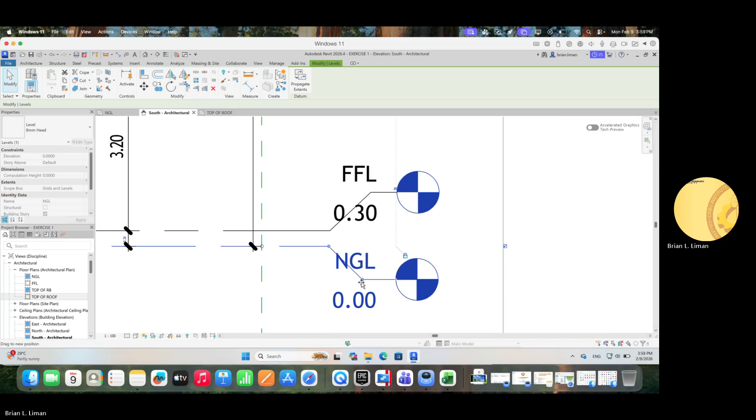That is to avoid text that overlaps. Again, as designers, when we document, we present as much as possible with legibility in mind. No text should overlap, otherwise the construction people will get confused.

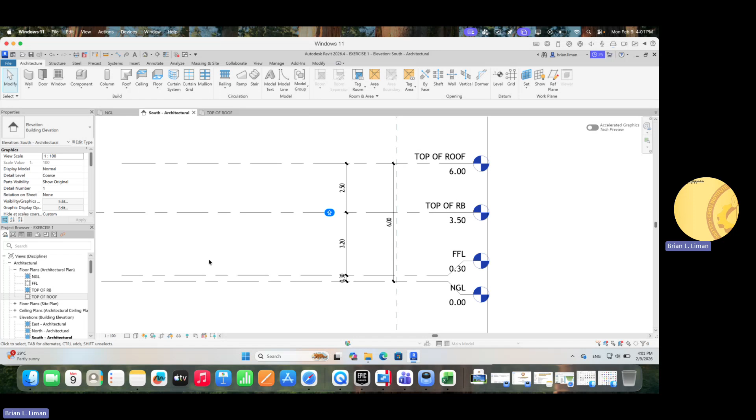Okay, so this is view, which is FFL, finished floor line. Okay, this level. Sa may makita nato, natay makita nga elevation tags. Okay, these are elevation tags. Makita nato sa babaw, sa upo, sa right, left.

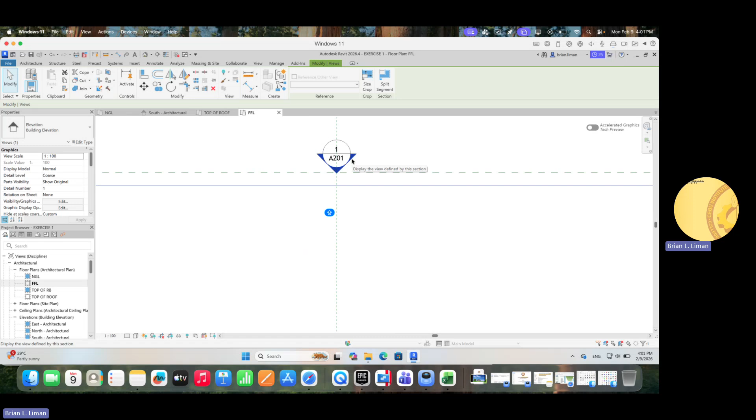Actually, kung ato na siyang i-click class, no? Kung ato na siyang i-click, you click on that, then you right-click, you can go to elevation na makita na nito. Okay? Sige, ato na i-try class, like this one. You click on that, right-click, and then you go to elevation view.

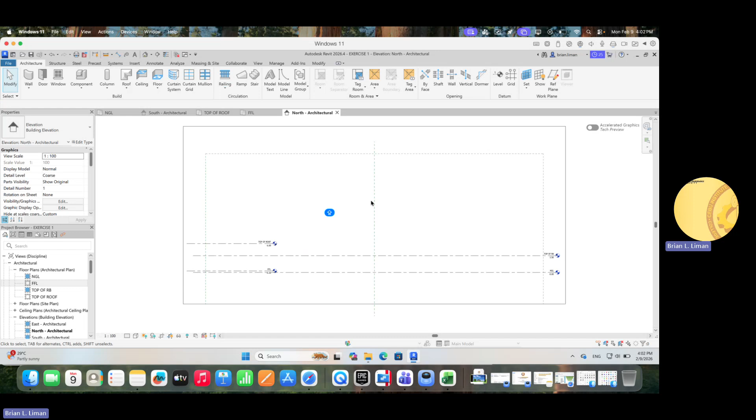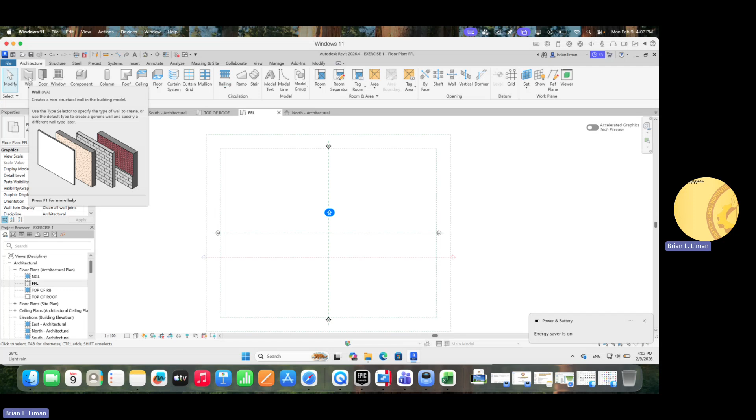Okay. So we'll try wall. Okay, basic man ang wall, no? Asa man ang wall? Nasa architecture. So atong i-click ang wall. This one, shortcut is WA. So, pwede na po ka mo type WA. Click on that. So the tool is activated. We are now inside the settings of the wall.

So, arita sa type selector, basic wall, generic, 200 mm. So, the thickness is 200 mm. So, we want, example, 150 mm. So, just like dimension, edit type. Okay? Then, next, duplicate. Duplicate ta.

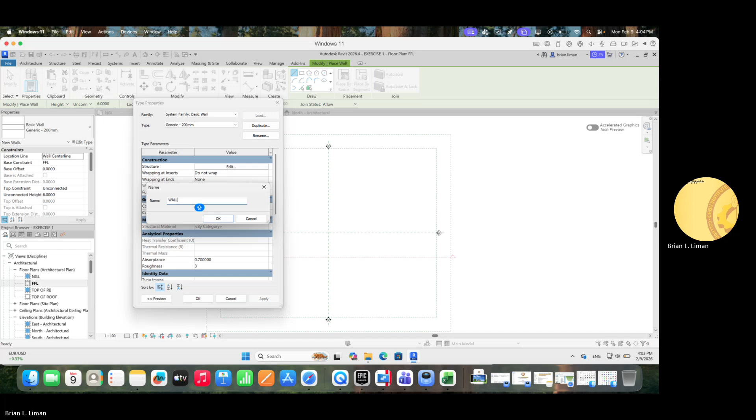Now, before ta mag-apply, arita sa structure. So, structure. This one. Okay? This will appear. So, kanilang sa ato ang i-edit for now. That's 0.2 meter or 200 mm. Ato nang ilisan og 0.15. You type 0.15. Okay? Default is 0.2. 0.2 is 200 mm. 0.15 is 150 mm.

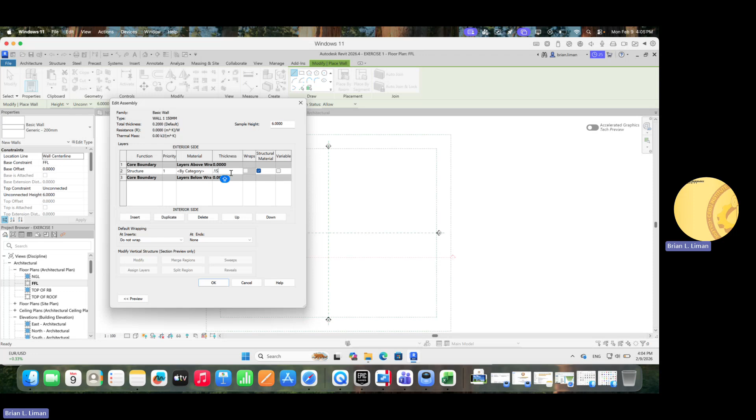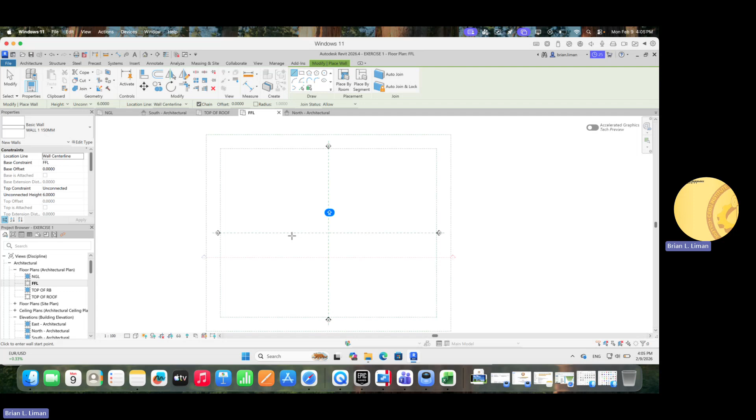Okay? Then, apply. And then, okay. So, the current wall is now this one. Basic wall, wall 1, 150 mm. So try to kuan class. Okay, currently naka-line ta. So example lang, hover ta diri, click ta, murag line gyapon, you make the first click starting point.

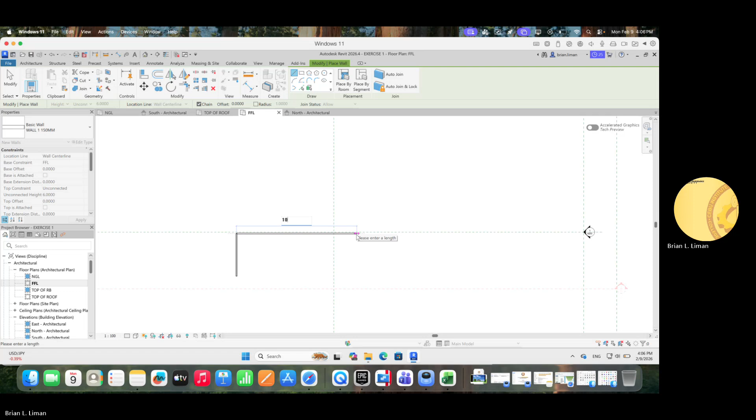Then as shown, reflected ra pod ang information sa pila ka degrees, the distance covered, pila na ang length sa wall. But pwede ra kita mo type. Example lang, 6. You type 6 meters. Then, enter. So 6 na siya. Then we go to the right side, 10. Line sa CAD. 10. Enter. Then, dali na po sa ubos, 6.

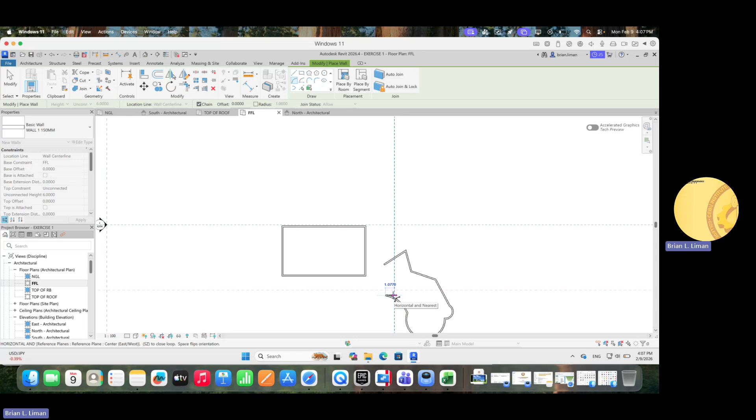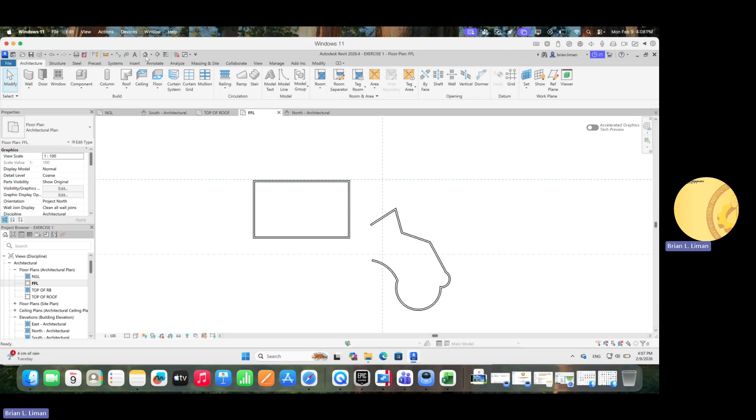Yeah. To end the tool, escape. Dua ka escape. Okay? So, we want to check the 3D, the feedback in 3D. Kay 2D man siya, mga lines lang. But we want 3D feedback. So, nara sa babaw class, default 3D. Click on that. Then, mo na ito makita.

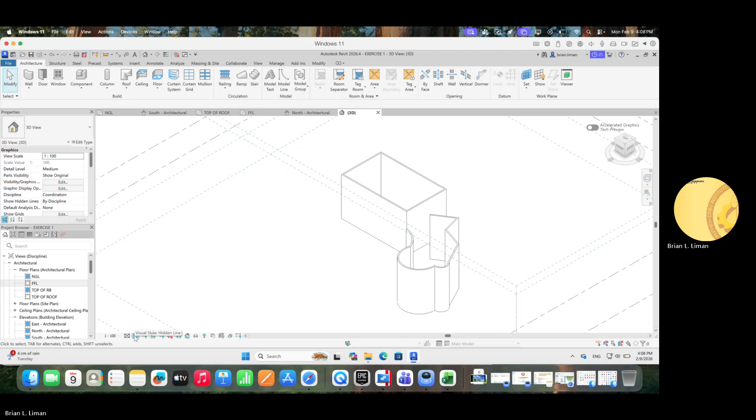So, katong random lang, mo ni siya. Katong ganihang based on rectilinear, mo ni siya. Okay? You want shading, nara diri ang shading sa ubos. Shading. You want shaded. You want consistent colors para imong ma-appreciate ang iyahang form. Now, go back ta sa FFL.

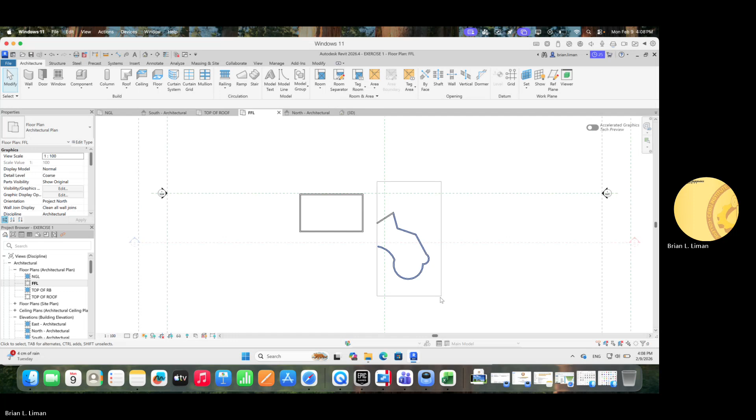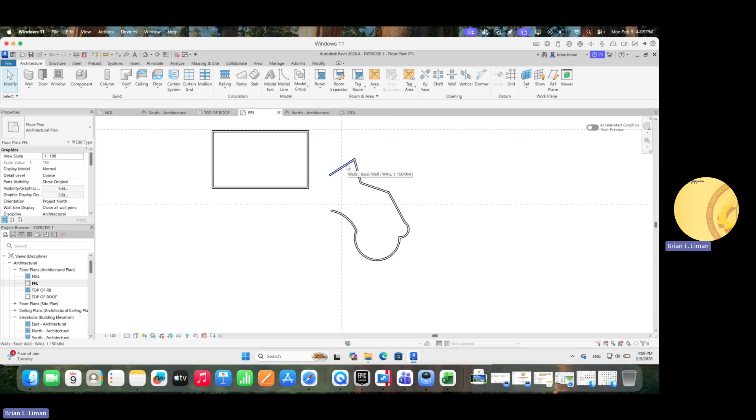So, by the way, selecting objects, pwede siya individual selection, individual picking. Pwede po siya windowing. Okay? So you hover on one wall and then press tab, then it's going to be selected all. Okay? Yeah, delete na. Pwede window, pwede individual picking. Press delete para ma-erase. So this is the plan.

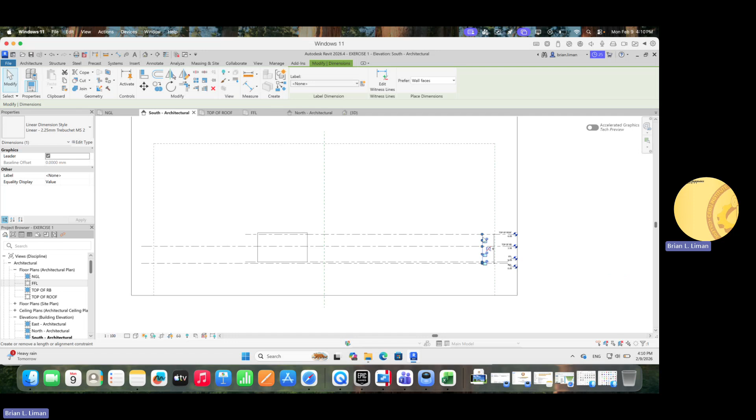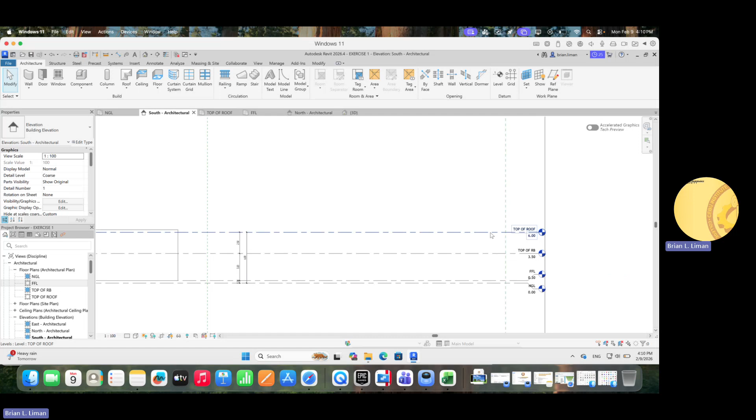So hover, select dimension, and then hold the mouse, left clicking. Okay? Click, then hold the mouse for moving. Yeah, kani siya, ato na siyang i-position, dol-dol, rather para dali na to ma-relate.

Okay? So this is our structure. Ato lang i-shade for us to identify the bottom and top. Okay? This is the wall. Ato i-select ang wall, class. Okay? So pila may height sa wall diri? This is 6 meters. So asa man siya nakatungtong, class? Where is the wall standing? On what level? On the FFL.

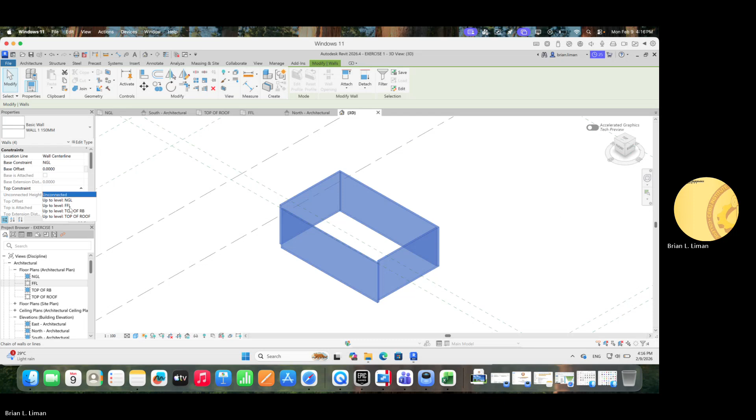So ang pinaka effective is you have to select the walls. Again, you can hover on one wall, then press tab. It will select all. Click. Then after clicking, base constraint is NGL. Top constraint is top of RB. Okay, so the same na sila. Okay, so pwede na pag individual clicking of the walls.

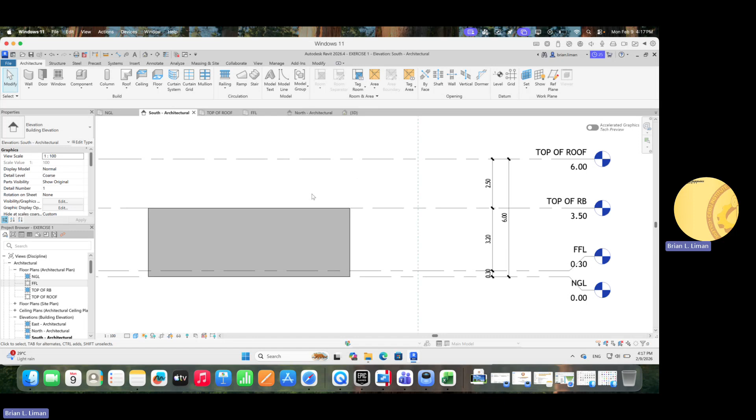So tanaw na to sa elevation, class. Okay? So unsa na may naa sa elevation? I-follow na gyud siya sa top of RB 3.5 and NGL. Okay? So what's nice with the constraints? For example, instead of the value 3.2 meters, you change your mind. You click the level, you click the text, the values, and let's say you want 3.5.

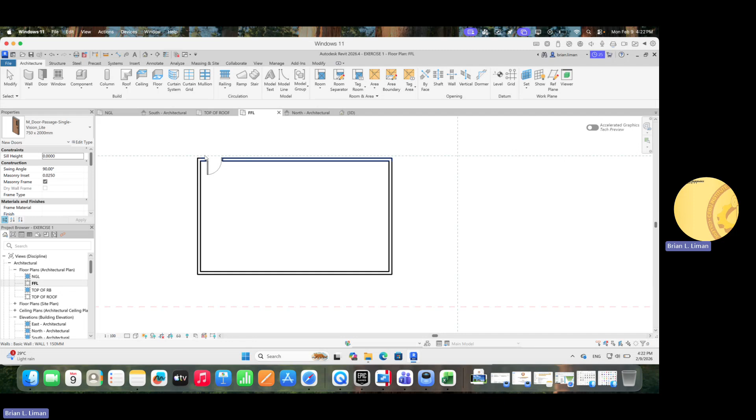So what's nice is automatic naman na siya, class. It created a door. Then sa 3D na po na siya. You click the door. Pwede na ma-change ang iyahang orientation. You can change orientation. Ito na siya sa open sa gawas. Pwede mong i-change ang iyang pag-swing.

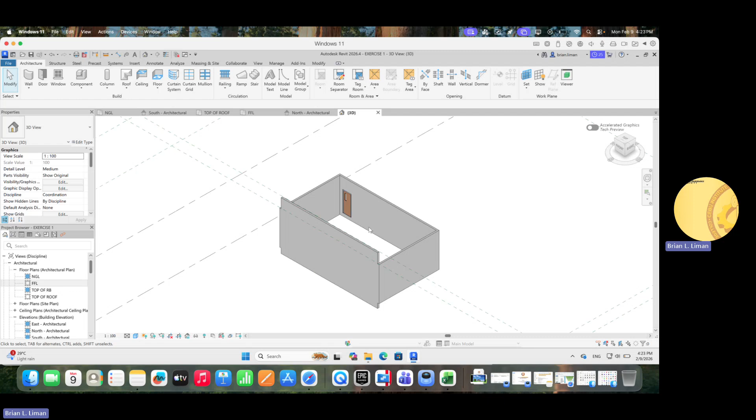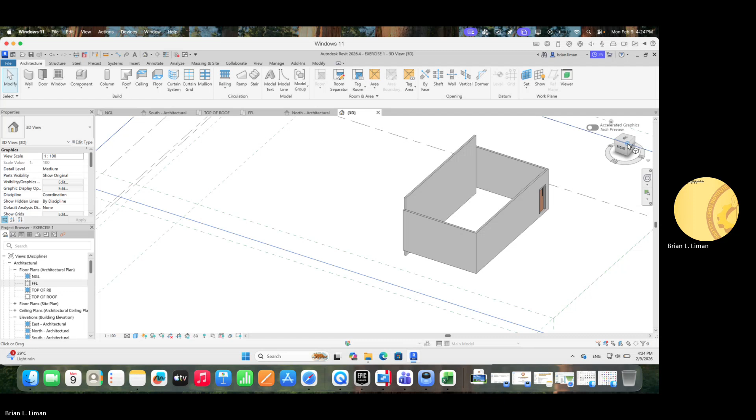If you want the wheel, pwede na i-orbit ang wheel. This one. I-click lang na siya, then wheel diya. Escape, escape. If you want to use this view cube, pwede po yung view cube. Okay? Mao na siya ang view cube, class. This one. So pang-click lang na siya, asa imuhang gusto nga tanawon.